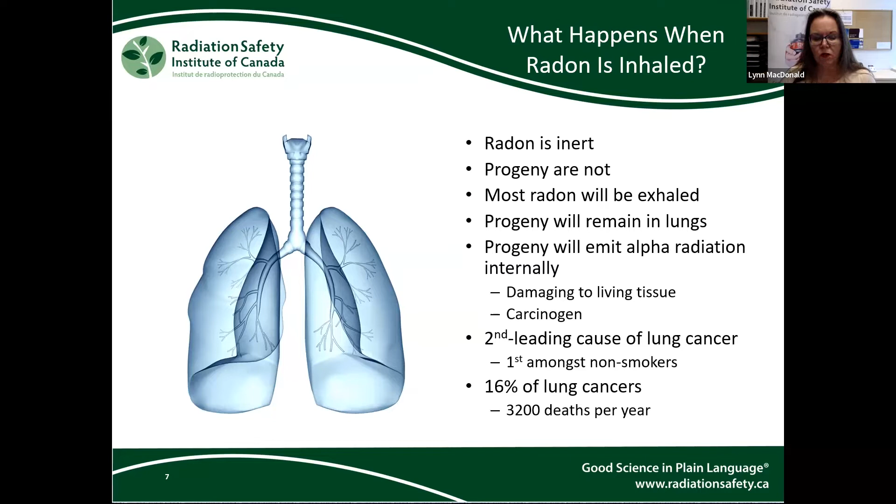According to Health Canada, exposure to high levels of radon, and therefore its progeny, is the second leading cause of lung cancer and the leading cause of lung cancer amongst non-smokers. They estimate that 16% of lung cancers in Canada are attributed to exposure to high levels of radon in indoor air. That translates into 3,200 deaths from radon-induced lung cancer in Canada per year.

The activity of a radioactive source is measured in becquerel. One becquerel is one radioactive decay per second. The concentration of radon gas is measured in becquerel per cubic meter of air.

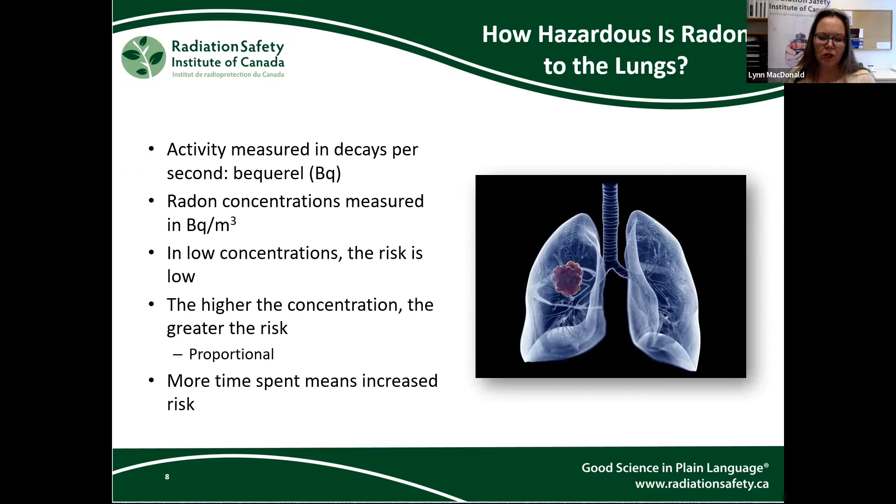In small concentrations below a few tens of hundreds of becquerel per cubic meter, the lung cancer risk from radon progeny is extremely low. The risk of cancer is proportional to the concentration of progeny, and it also increases with time. A working group of the Federal, Provincial, Territorial Radiation Protection Committee found that for non-smokers, chronic exposure to high levels of radon gas brings the risk of lung cancer from 1 out of 100 people to 5 out of 100 people. For smokers, it raised it from 12 out of 100 to 30 out of 100.

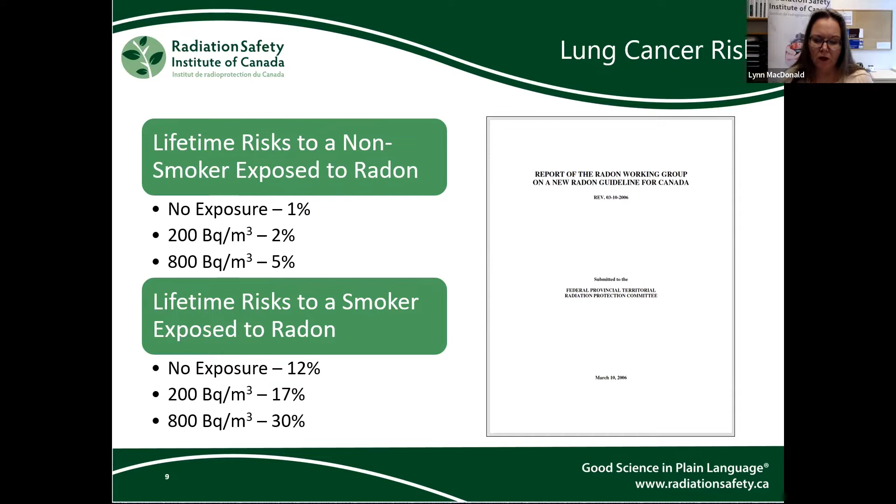It is important, therefore, for people to use a long-term test during the heating season to see the levels of radon to which they are exposed.

If the levels are between 200 and 600 becquerel per cubic meter, they should remediate within 2 years. If the levels are above 600 becquerel per cubic meter, remediation should happen within 1 year. For more information on testing and mitigation, Health Canada and our website have numerous resources.

In addition to having radon resources, CARST and the Canadian Cancer Society are on the advisory team for the Take Action on Radon National Initiative. On the Take Action on Radon site, you will find information on several programs to support testing and mitigation.

Making our homes and buildings more energy efficient is beneficial in many ways. It helps address climate change, lowers heating and cooling costs, and makes our indoor living spaces more comfortable. But several of the qualities of energy efficient buildings impact airflow, for example, airtight construction and air sealing.

Our guest today will speak to how making a building more energy efficient can impact radon levels in homes and buildings, and considerations for those who wish to have both energy efficiency and low radon exposure.

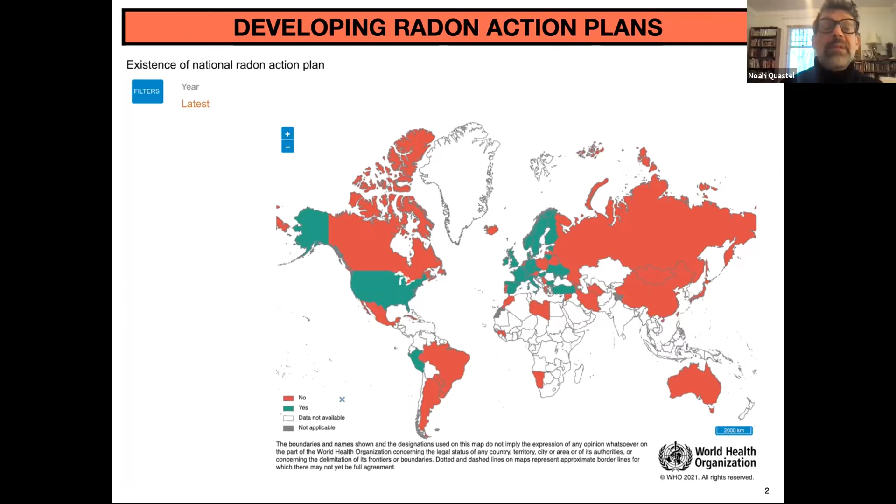One reason is that the voluntary approach isn't working very well. Stats Canada keeps numbers on knowledge of radon and testing, and only about half of households have heard of radon. Of the households that had heard of radon, only 6% had also tested. So that's about 3% of homes across Canada having been tested. People clearly aren't getting the message. If we want to save lives en masse, we're going to need everyone to test and, if necessary, mitigate. So we can think of it as a public health intervention.

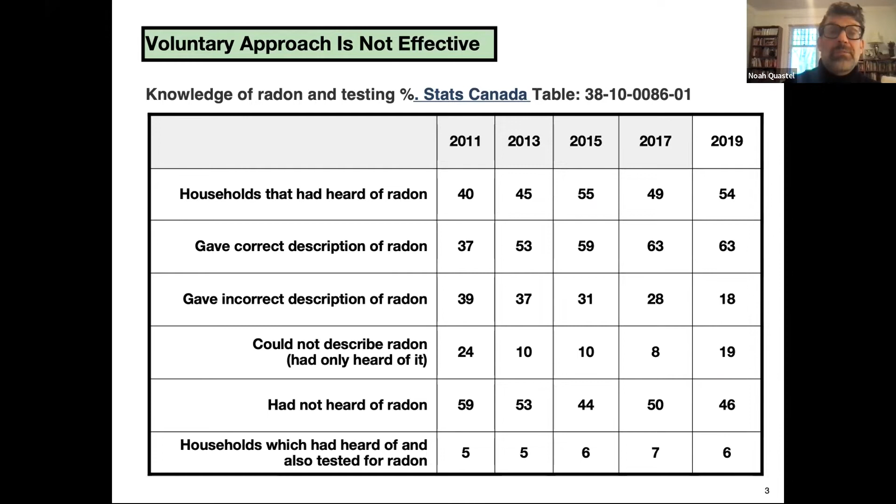We do have radon in the building code in Canada, and it varies across the country. The National Building Code doesn't call for a full radon system; it calls for a kind of a stub. We haven't talked much yet about the technologies people use to fix radon, but it consists of subslab depressurization. One puts a vent pipe into the basement which exits the building, decreasing the pressure differential, stopping radon from being sucked in, and exhausting any radon underneath the slab and foundation out of the building.

The approach in the National Building Code so far is to just call for a rough-in, which is a kind of a stub, with the idea that people will, if they test, put in a full vent pipe and a fan to drive the system.

In most of the country there's a requirement for a rough-in in the provinces and territories that follow the National Building Code. BC has upped it a bit to require a full vent pipe, but only in specified locations. In Ontario, where radon is known to be a problem by local authorities, builders have three options: a simple membrane to try to stop radon coming in, the rough-in stub, or a full vent pipe. In Quebec, if local area tests show need for a full vent pipe, there are provisions in the construction code.

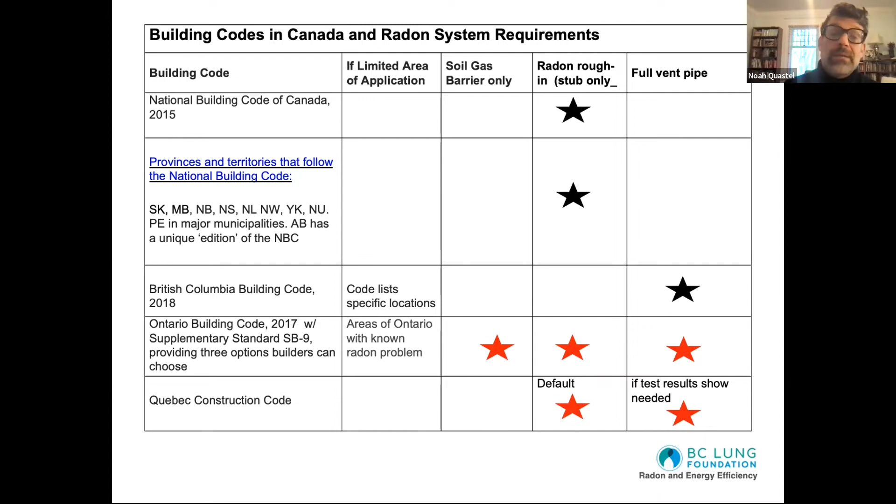Apart from the building code, there aren't a lot of really clear rules in Canada. A lot of the radon rules stem from an older era when it was seen to be a problem for miners. So in many cases we'll see workplace regulations allowing very high radon levels, with the assumption that that was allowable for miners. But when we think of the many different places people work, like schools and daycares, or people living in rented homes, it's harder to see that kind of overall package.

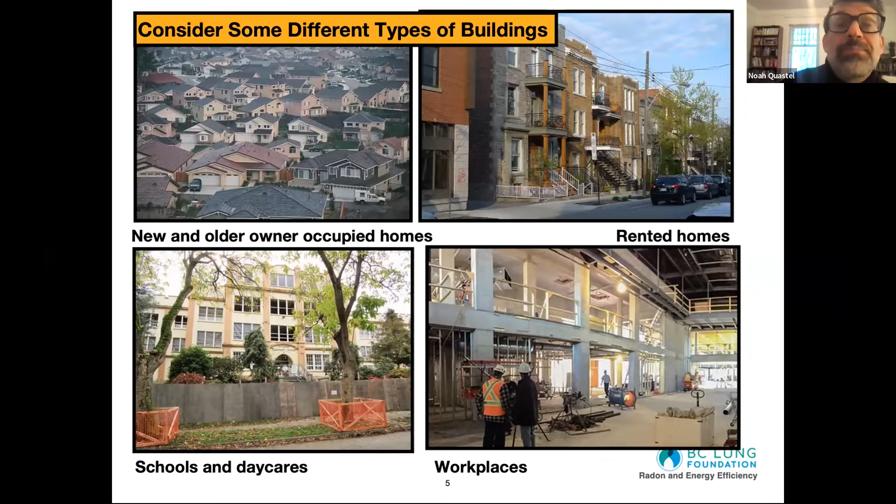So we could ask ourselves, what does a good radon plan look like? A lot of the work you're seeing here is now in Health Canada's Radon Action Guides. They put out guidance for provinces and territories to deal with radon. Health Canada itself works quite a lot on education, outreach, and technical standards, but they don't have the jurisdiction to actually set laws for the built environment. So instead, Health Canada has put it on provinces and territories to take action, giving toolkits for how that could happen.

Ideally, we might set a goal for a radon action plan, such as reducing lung cancer deaths or eliminating high radon across the built environment. We want a monitoring and surveillance system: how many homes and residential buildings have high radon? What regions are more prone to high radon buildings?

Now, in the next slide, I'm going to say where this stuff is actually happening and sort of where we're at in Canada.

So reference level: at what radon concentrations should action be taken? Well, in Canada, we do have a national radon guideline.

Education and awareness, of course, to tell people that it's a problem and spread it, and ensure the right kind of education for professionals who design and build buildings. I've gone through the building code for radon and new construction.

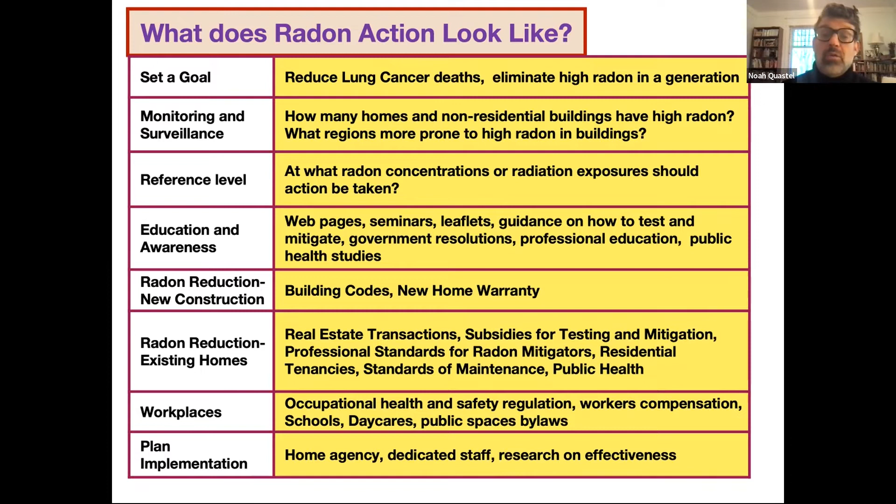Now, it's a much bigger challenge reducing radon in existing homes that are already built, because for the most part it's about convincing people. But we could look at real estate transactions or subsidies, professional standards for radon mitigators, rules in landlord-tenant law or residential tenancies, and public health measures. And again, in workplaces, we can look at occupational health and safety, workers' compensation, or school or daycare rules.

So where are we at in Canada? No province or territory has an action plan or set goals for radon elimination. We are starting to get better maps.

In British Columbia, the BC Centre for Disease Control has an excellent map, and so does Nova Scotia. Health Canada and C-NRPP have also put together maps. We have a reference level of 200 becquerels per meter cubed. We always like to emphasize that includes homes and workplaces as regularly occupied spaces.

The National Radon Program and Take Action on Radon have been doing a good job in education and awareness, and you'll see radon mentioned in the websites of many cities and health authorities now.

In new construction, we do have building codes, and in Ontario there are rules saying radon is an issue in new home warranty. For older homes, some provinces' real estate governance organizations have said radon is a latent defect, which means that a seller has to tell a buyer if they know the radon levels.

We have cases in Ontario and Quebec of landlord-tenant law. But for the most part, and we can go back to the stats from Health Canada, there's not a lot of testing happening, and very few occasions in which people are confronted and have to test their homes or workplaces.

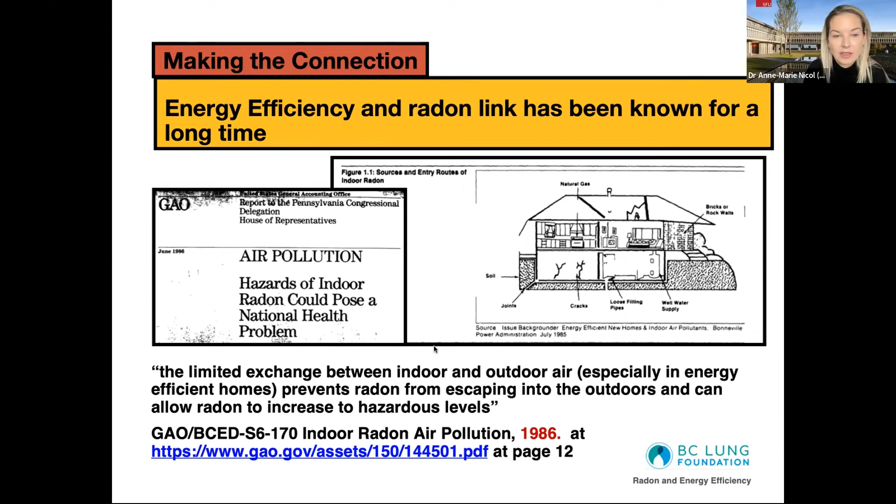So I did a nerdy academic review. I'm trained as an epidemiologist, so I went and did peer review research and government reports. What I found was that most of this research had been done in Europe and the USA, just a little bit in Canada. Lots of different methodologies had been used to examine the relationship between radon and energy efficiency, including knowledge synthesis like literature reviews, modeling assessments where people used computer programs to see what happens if you alter one parameter and not another, and actual measurement studies where they tested homes before and after energy retrofits.

I felt that this research was really close to what we would want to understand for our Canadian housing stock. The United States has been a leader in this area, and they've recently put out a 2020 report that synthesizes a lot of the evidence from the last 20 years. As a result, they've published guidelines for the EPA recognizing that energy savings need to include the word health with them, because in our efforts to manage climate and the environment, we may very well be leaving health out of the equation.

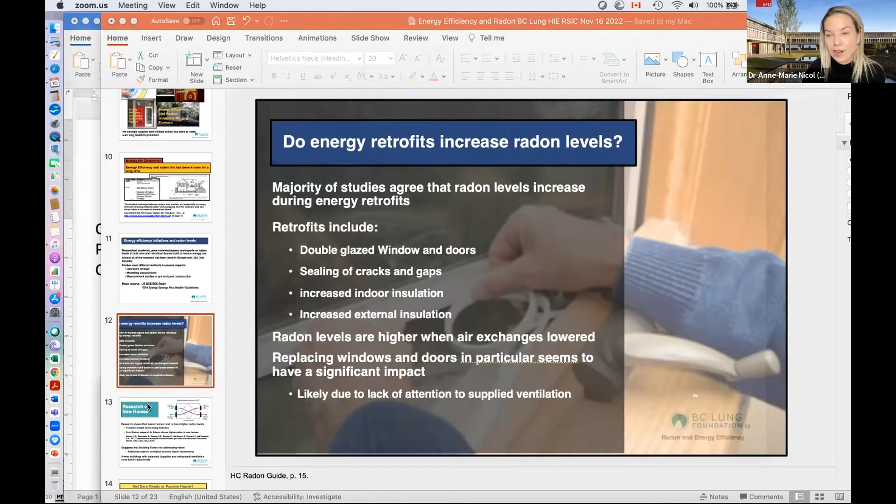Next, please. Let me see if I can go back to the slideshow. Okay. This isn't - so I had done my analysis on older, existing homes, because I'm interested in retrofits, but we also have some evidence in Canada that over time, radon levels are increasing in new homes too.

And I work in public health, and I've been told, oh Anne-Marie, don't worry about it, the building code is going to solve the radon problem, in 70 years there won't be a radon problem. But the evidence points to the contrary.

A fairly large study was done in Alberta that clearly showed that the newer a home was, the higher the radon levels were on average. They put this down to things like a larger footprint of a home, poorer construction materials that led to more cracks in the ground, things like vaulted ceilings that help draw radon gas from the ground into the home, and also the fact that we are building things in a more energy tight and efficient way to save money and address climate targets.

One caveat though is that newer buildings with balanced systems, so supply and exhaust are balanced, may actually have lower radon levels. So a small signal in this analysis that not all new homes, but homes built in sort of regular subdivisions, might be impacted by these measures.

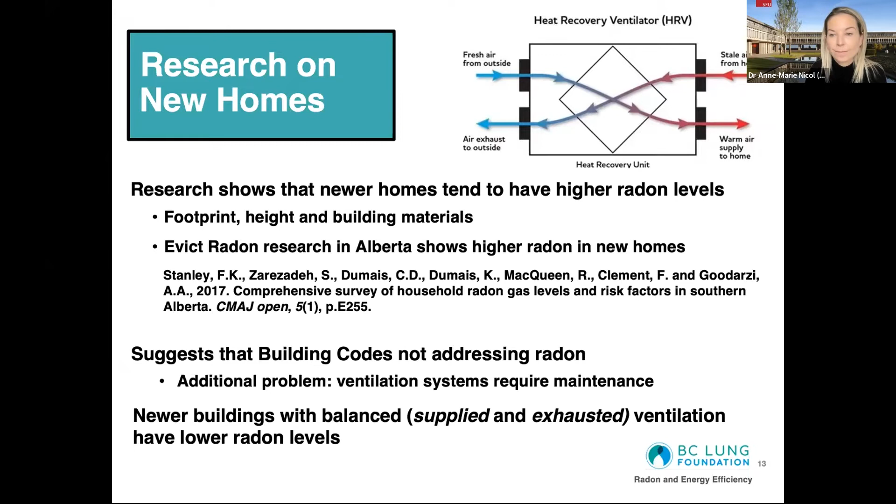There has been some evidence looking at what we call specialty homes, so net zero or passive homes. They build these a lot more in Europe because energy is more expensive there, and there's a much bigger push to build these types of homes. Some are built in Canada, but these don't generally include radon in their codes, since they're done for ventilation and energy related factors.

There was a study in Ireland that showed these kinds of specialty homes, when built right, tend on average to have lower radon levels. But the fourth home in this study actually had higher radon levels in certain rooms, so they're not a guarantee, but they might be better. These aren't cheap homes though, so they take a lot of effort to build and maintain. It's possible this is a solution for newer homes, but might not be accessible to the average person.

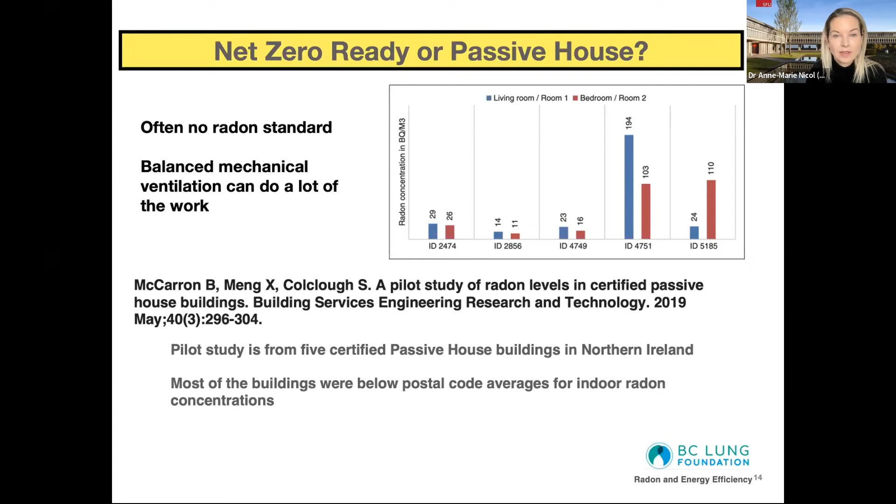High performance homes could help us deal with elevated radon issues, but they need to be built right, and we have some guidance within the building code. One of the big things is the membrane. One problem with energy efficiency initiatives is that they address the upper part of the house where radon can leave, but they don't deal with the ground part where radon comes up. So we're still allowing communication with the underground soil that lets radon into the home.

It just can't leave. There's research done in British Columbia looking at what happens if we have good mechanical ventilation using heat recovery systems and a passive system. They did find some improvement in radon levels with these systems built in. So ensuring good airflow, using materials under the slab to reduce communication with the soil, and having a proper fan to draw the radon up and out of the home - these are factors that will help reduce radon in newer homes.

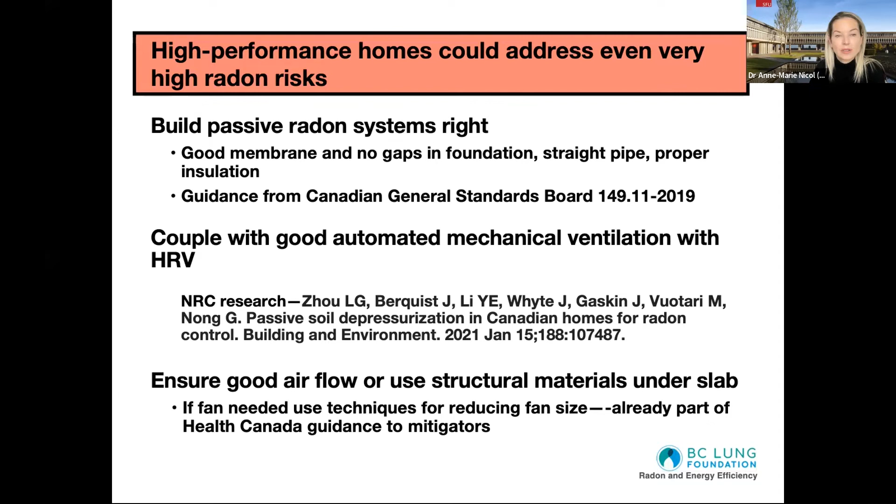Okay, oh, I guess back to you. I'm gonna speak now. Okay, I have lots more to say, but we'll save it for question period. I'm looking if there are any questions, but I guess that's gonna wait till the end. Okay.

Now, it hasn't been found particularly for radon, but there's no reason in principle that a contractor who creates a high radon environment through a building retrofit, leading to someone getting lung cancer and dying, couldn't face substantial liability. I'm not worried - I mean, on the details, a case like that might be hard to go through, but in the law, I think it's pretty clear.

We have lots of cases in our legal system of informed consent. So if I'm a university researcher experimenting with a new drug, I really have to tell people what they're getting into before they take part in my research. In medical procedures, if I'm putting in something - actually almost anything, any kind of surgery - the doctor will say we need your consent for this procedure, and the doctor is going to warn you. So it's a double-fold way of dealing with the duty of care: to get informed consent and to give a warning.

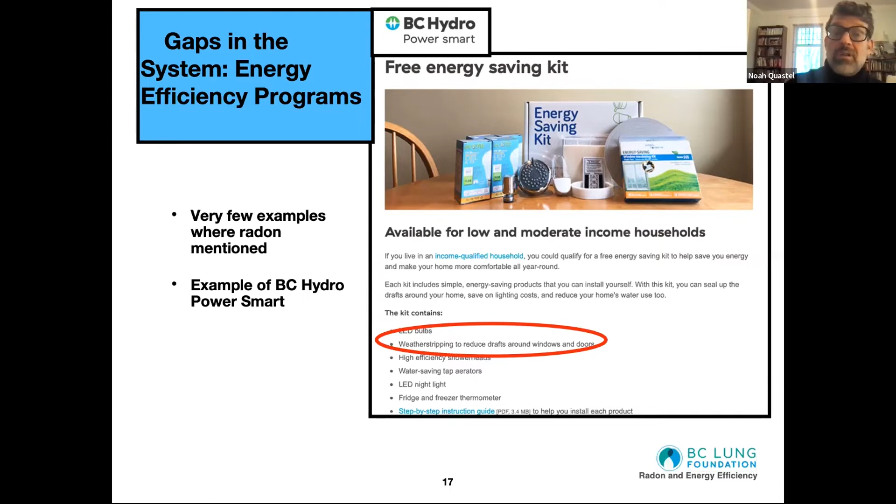Parts of the interior of BC, like Castlegar and Prince George, have extremely high radon levels. Over 30% of homes in many communities in BC have high radon, but there people are putting on the weather stripping under BC Hydro's advice. And they're nice about things. They're giving away free energy saving kits, and they have a guide on how to use the energy saving kit, an installation guide, and it does not mention radon at all.

So there's actually no warning given whatsoever. This is typical, to be honest. There's just a widespread lack of information about radon associated with the energy efficiency industry.

So we can also look at the grants and loans out there. Canada Greener Homes, there's actually no funding for ventilation or HRVs either. So they're just not concerned about indoor air quality and the relationship between energy upgrades. So it isn't covered. That's for homeowners to do if they want to.

CMHC Green Home, this is a grant program associated with CMHC. In high rises, there's a LEED standard. So radon actually isn't in the LEED standard for low rise construction and single family residences. No, there's nothing there.

The Energy Affordability Program of Ontario's Independent System Operator has no provisions for ventilation or HRVs. Enbridge, just no mention of indoor air quality. Clean BC, no mechanisms for mechanical ventilation. We did find necessary health and safety and ventilation upgrades getting a limited amount of money on Clean BC's income qualified program, and we'll go talk to them and see what they think about including radon in there, but I didn't see any indication that that was included to date.

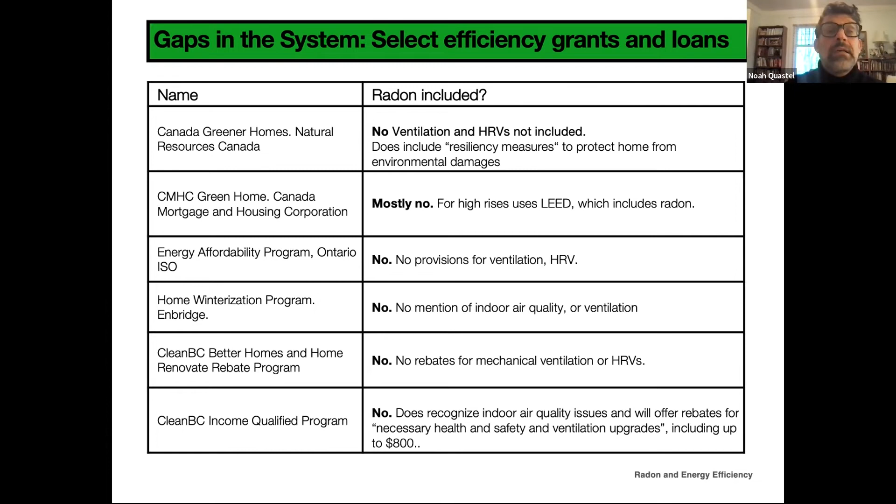Now, homeowners are often putting up energy efficiency upgrades on their own. The way our system works is people hire an NRCan advisor, usually with some subsidy from Canada Greener Homes, but homeowners are supposed to put things together. So they can do the weather stripping themselves, or they could put in a heat recovery ventilator or a heat pump. But it then falls on the homeowners to understand the home as a system and the indoor air quality and radon implications.

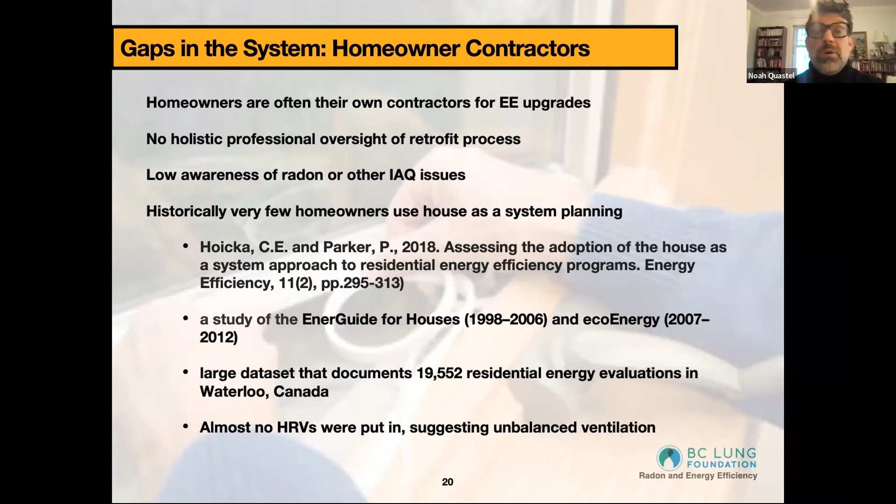There's an interesting article from Hoicka and Parker, which looked at 19,000 residential energy evaluations in Waterloo and found that people weren't generally putting in HRVs. So when you actually study what people are doing, homeowners are really not putting attention on indoor air quality.

We talked to energy advisors and we found some interesting issues. In fact, NRCan does know radon's a problem. In the end notes, the HOT 2000 software, which is used by all NRCan advisors, it says watch out for radon, it might be a problem. But the energy advisors don't actually know the software is doing this, because of how they input in their computers, and the printout, they don't see.

So when we talked to the advisors, we said, is there any mention of radon? They didn't know, no, we don't know about it. Do you know that HOT 2000 includes radon warnings? No, they didn't know about it. And of course, they weren't discussing it with their clients. The clients weren't raising indoor air quality and radon issues. And there's no formalized process to talk about it.

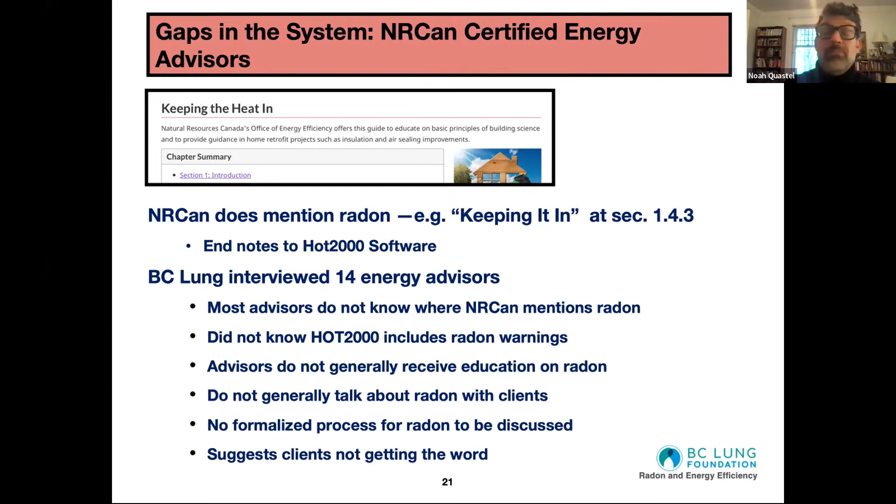So clients aren't getting the word, but the NRCan advisors are part of an industry which is making buildings airtight and potentially increasing people's lung cancer risk. And there are going to be people who get lung cancer and die out of this process. And there is no process of informed consent or warning happening properly. So that is a serious gap in liability.

So we have solutions going forward: education and training for energy advisors and contractors, clearer messaging in energy efficiency guides and manuals on IAQ and radon. And the EPA's Energy Savings Plus Health is a good starting point.

We want advisors and contractors to give the message to test after a retrofit, right? This isn't such a big ask, all that needs to happen is people know about radon, test after a retrofit, and then mitigate if need be. That mitigation is not going to significantly hurt their energy efficiency improvements.

So it's just about knowledge and making sure there's informed consent. Contractors could easily get clients to sign off, as so could NRCan advisors. Contractors could also play a role in ensuring that there's testing after a renovation and then helping with mitigation.

We want product warnings on manufactured goods that tighten buildings. And I think most immediately, and which should happen if we lived in a more just world, is that when people are given grants and incentives for energy retrofits, testing and radon mitigation are covered as well.